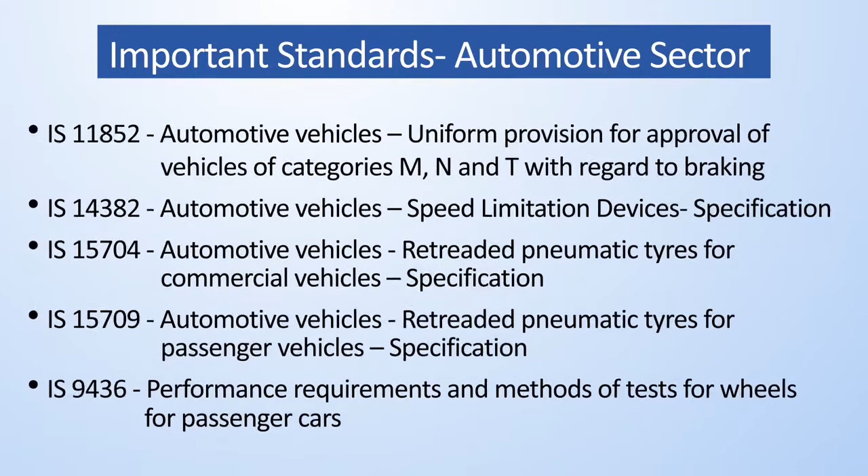BIS has formulated more than 400 standards related to automotive sector. Some of the important standards are on engine and engine components, brakes and braking systems, suspension systems, tires, tubes and rims, and electrical systems. Now let us talk about some of the standards in detail.

Do you know? Cylinder is the power unit of the engine. This is where the fuel is burned and converted into mechanical energy that powers the vehicle. It contains a piston that moves up and down, compressing the fuel which ignites and causes combustion. A cylinder liner is one of the most important functional parts to make up the interior of an engine. It serves as inner wall to the cylinder and forms a sliding surface for the piston rings. A poor cylinder liner results in wear and tear of piston rings, escape of compressed gas, and poor transfer of the heat to the coolant.

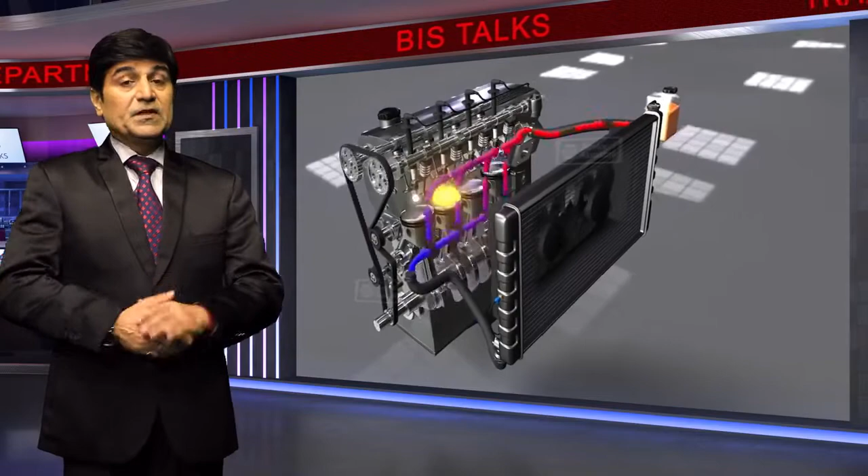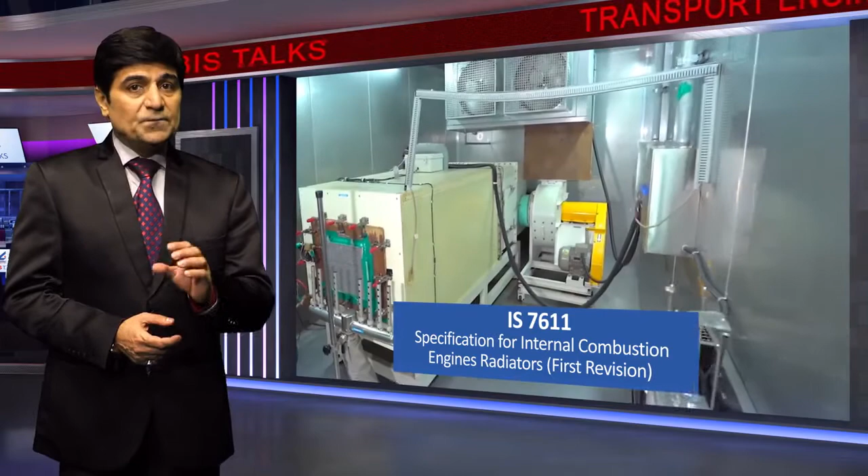Most of us know about the radiator, which is actually a heat exchanger. It transfers heat from the fluid inside to the air outside, thereby cooling the fluid, which in turn cools the engine. Owing to the need for its effective functioning, it is strategically mounted in a position where it receives maximum airflow during the forward movement of the vehicle. The radiator, which passes the various tests specified by BIS, ensures efficient transfer of heat from coolant, effective cooling of engine, and prevention of damage to engine due to overheating.

We use the horn to alert others about the presence of our vehicle on the road. Sound emanated by an electric horn has to be within audible limits specified under IS 1884-1993. Owing to the role of the horn, the Indian standards specify mechanical, electrical and acoustical requirements and methods of testing for electric horns for use in motor vehicles.

The standard specifies terminology, types and classification of horns, dimensions and performance related tests such as high voltage test, dust test, current draw test, operating voltage range test, vibration test, continuous operation test, sound pressure level test, and water sealing test.

Safety glazing standard plays an important role in vehicle safety. Standards for glass in vehicles define the specification for use of glass and glazing in vehicles. Good quality safety glazing ensures adequate transmittance of light and a clear, undistorted field of vision. Use of any substandard safety glazing material in the vehicle could be harmful to the vehicle and its occupants. Using standard glass ensures that in case of any mishap, the windscreen and other glazing should not form a possible source of injury to the occupants.

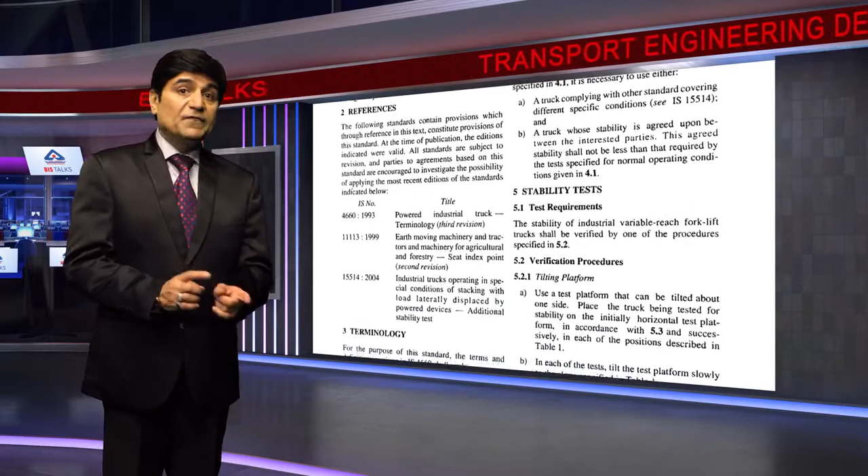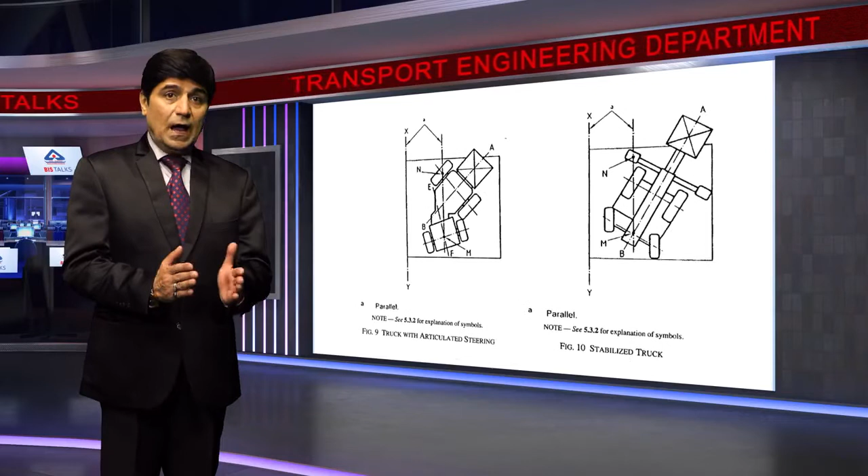Trucks running on these unending roads bring goods and essentials to us from far off places. The goods are packed in large containers and transported all over the world. To ensure that goods reach their destination safely, BIS has prescribed test conditions for the stability of trucks with and without load handling attachments. The stability of trucks equipped with tilting or non-tilting masts or fork arms having a rated capacity up to and including 5,000 kilograms are tested and verified.

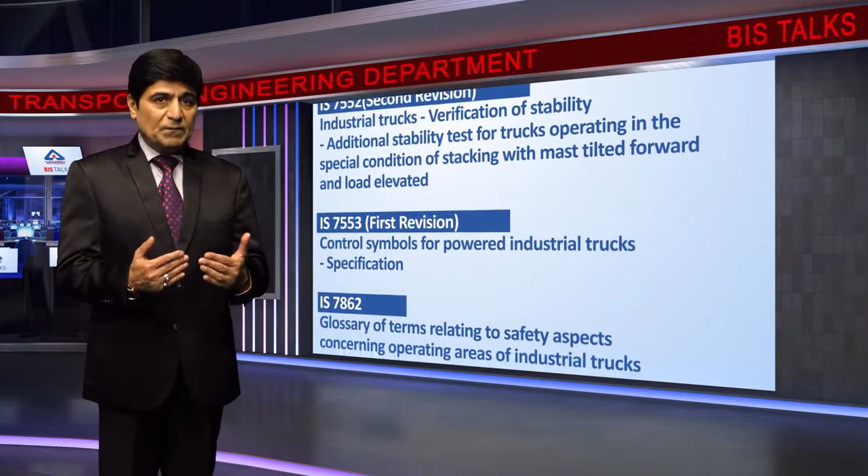To increase the stability and make the load handling vehicles safe, the Transport Engineering Department has been working on certain important designs and published some standards for the test methods.

IS 12056 covers the safety requirements for the integrity and security of fuel tanks, fuel tank filler pipes and fuel tank connections used on automotive vehicles, to minimize the fire hazard resulting from fuel spillage during and after a crash or collision. This standard applies to passenger cars, multi-purpose passenger vehicles, trucks and buses. This standard belongs to a sectional committee which deals with automotive body, chassis, accessories, garage equipment, springs and suspension systems.

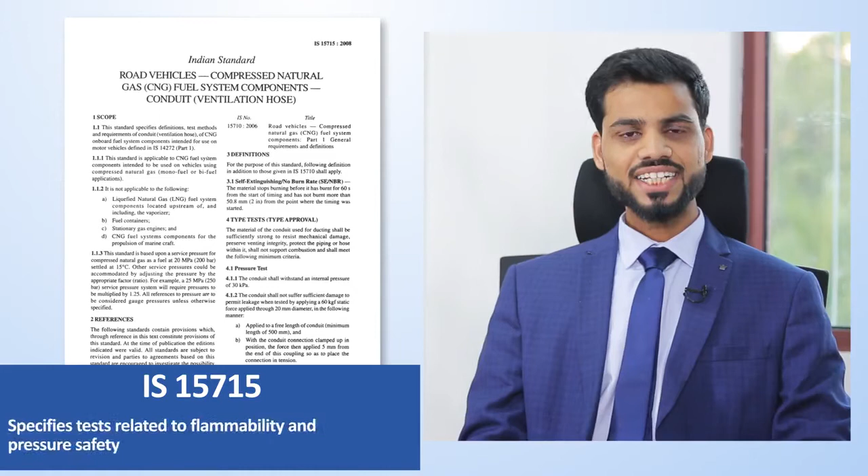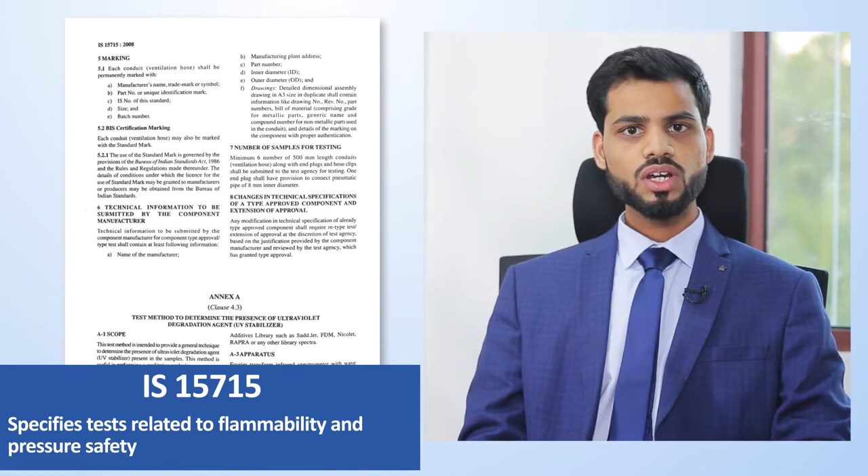IS 15715 specifies the definitions, test methods and requirements of conduit, that is ventilation hose, of CNG onboard fuel system components intended for use on motor vehicles. This standard is applicable to CNG fuel system components intended to be used on vehicles using compressed natural gas, that is monofuel or bifuel applications.

IS 16903 specifies the requirements and dimensions of space and strength of the seats for both driver and passenger and their anchorages for passenger vehicles of category L7, M2, M3 and N category goods vehicles, as well as for quadricycles. This standard is prepared by the technical committee which works on the passive safety crash protection system.

IS 15487 specifies the requirements for the indicator lights to show the status of freight container handling spreaders and grappler arms. This standard is applicable to container handling spreaders with twist locks for handling unladen and laden freight containers, as well as for grappler arms for handling semi-trailers and swap bodies when fitted to counterbalanced lift trucks, single side loading trucks, rough terrain trucks and variable reach trucks.

Well, another important mode of transportation is through the sea route. Gigantic boats and vessels have been used for traveling and transportation of goods for centuries. But now we have modern and sophisticated ships, so the standards in maritime sector have also been formulated.

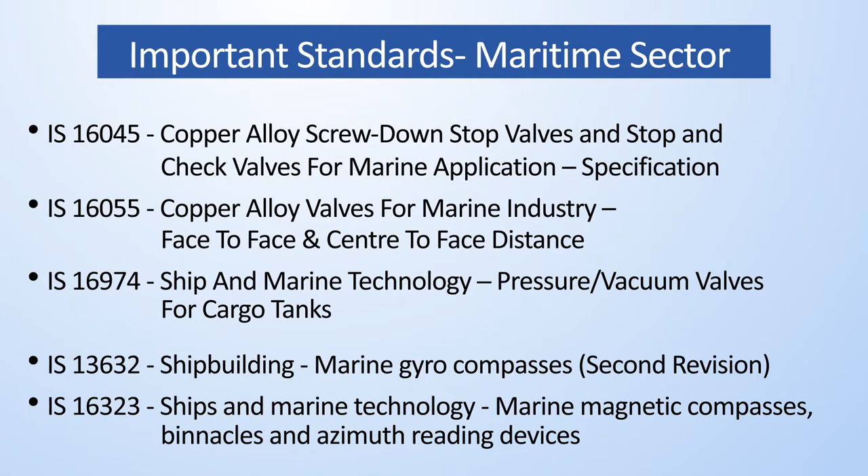Standardization work relating to ships and their systems, accessories and fittings, machinery and equipment for fishing vessels and trawlers, testing procedures, auxiliaries required for the operation of main propulsive machinery, winches, windlasses and steering gears, system and engineering for firefighting, fire protection and detection, magnetic and gyro compasses and connected items, instrument for chart work, auto alarm and auto keying devices have also been standardized.

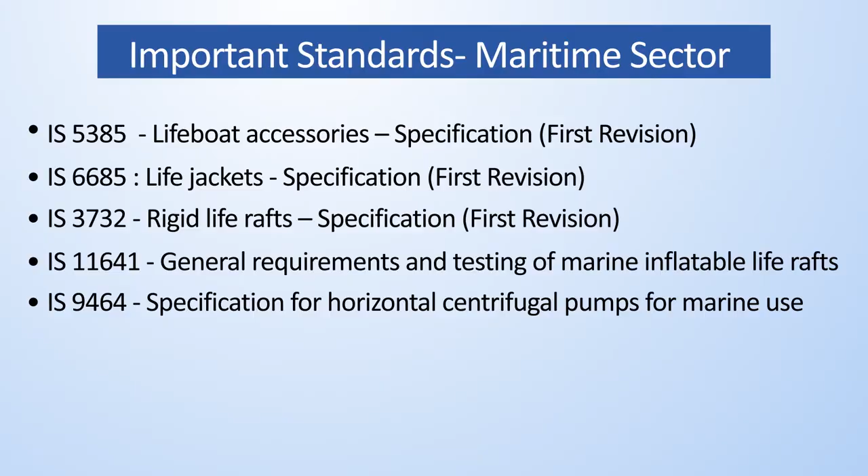Now let's listen to Shri Sharad Kumar, Member Secretary, for more details on the subject.

IS 14747 for lifts on ships lays down specific requirements for the design, installation and inspection of lifts on ships. The lifts in a ship are specially designed to withstand all shipboard conditions such as adverse weather, humidity, rolling and pitching. The standard covers requirements for landing door, car and counterweight and electrical machine. Requirements related to safety circuits like communication, lights, alarm system, and means of escape during emergency have also been specified.

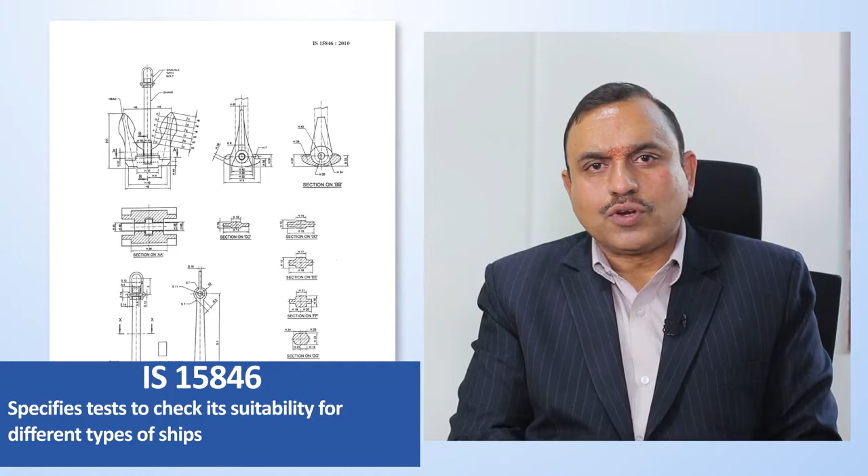IS 15846 for anchors. An anchor is used to connect a vessel to the bed of a water body to prevent the vessel from drifting due to wind or current. This standard gives information on how the anchors are classified, their shapes and dimensions. The standard also specifies the mass, grades of material from which the anchor should be made of, and various tests which are needed to be carried out on an anchor to check its suitability for different types of ships.

IS 13632 for marine gyro compasses. A gyro compass has become an indispensable instrument in almost all naval and merchant vessels for its ability to detect the direction of true north and not the magnetic north. A gyro compass is a form of gyroscope employing an electrically powered fast spinning gyroscope wheel. It utilizes the basic physical laws, influence of gravity and the earth's rotation to find the true north.

The standard specifies construction, performance requirements and type testing of gyro compasses. General tests like voltage and frequency variation test, vibration test, temperature test have also been specified. The availability of a gyro compass is also mandated under International Convention for the Safety of Life at Sea.

IS 6685 for life jackets. Life jackets are designed to assist a wearer to keep afloat in water. It is used for providing a means of safety for all persons whose occupation or recreation is connected with water. The standard specifies design requirements, sizes, requirements related to buoyancy, buoyant material and their protection. The standard specifies tests related to strength, visibility, audibility and other tests for life jackets suitability.

The standard incorporates requirements under Indian acts and rules. Requirements of international conventions like IMO resolutions and safety of lives at sea rules and regulations have also been covered.

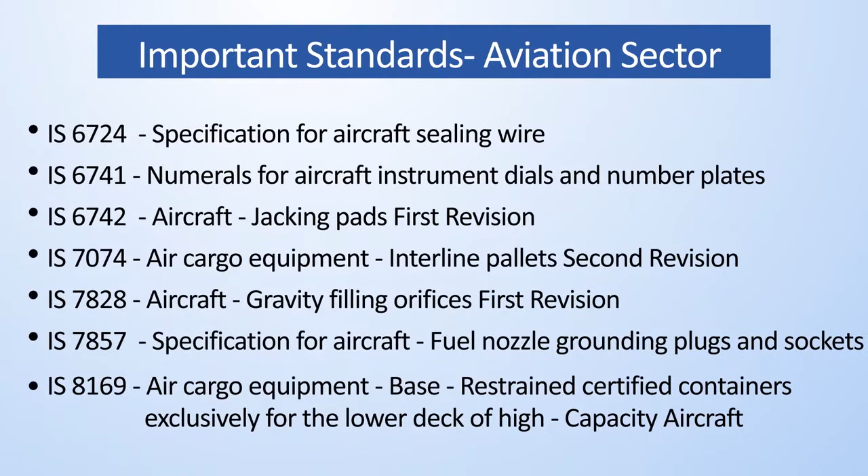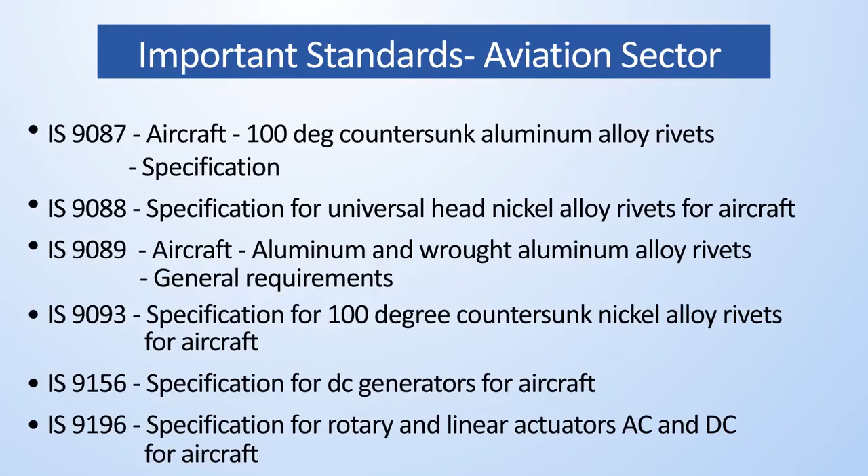Approximately 150 standards have been formulated by BIS in the aviation sector. Some of the important standards are on air cargo equipment, numerals for aircraft, instrument dials and number plates, DC generators for aircraft, general requirements for aerospace bolts and nuts, aircraft safety belts, aircraft tires, rims, seat rails and pins.

Let's listen to the views of Shri Ravinder Beniwal, Member Secretary of Aerospace Sectional Committee.

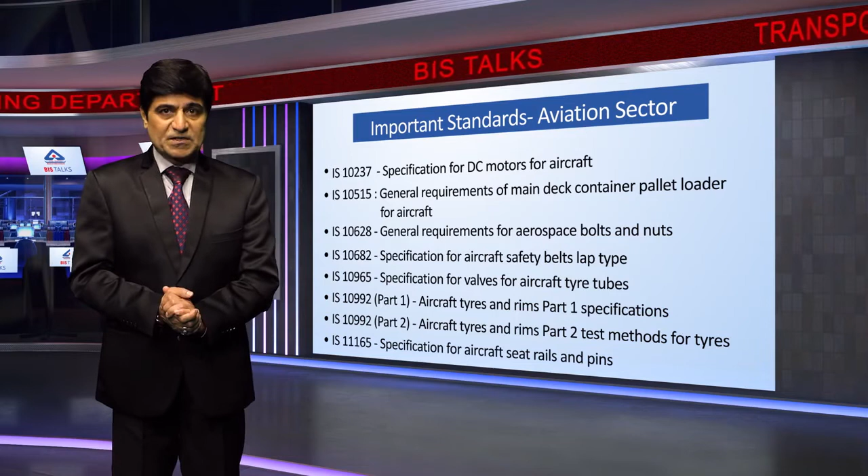I will explain the important standards in aerospace sector, like IS 10240 for general requirements of electrical equipments for aircraft. The safe and economic operation of an aircraft is becoming ever more dependent on electrical and electronic systems. Electrical equipment used in aircraft are subjected to special severities in actual service.

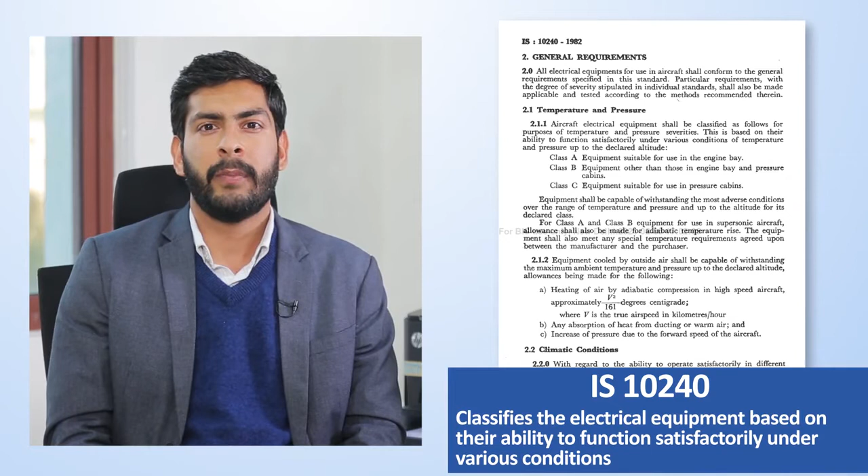This standard classifies the electrical equipment based on their ability to function satisfactorily under various conditions of temperature and pressure up to a certain altitude, climatic conditions, acceleration and vibration, and stipulates the respective requirements.

It also stipulates tests for insulation resistance and radio interference of the equipment while prescribing the design requirements.

Another standard, IS 8252, is on environmental tests for aircraft equipment. This standard details climatic environments against which aircraft equipment should be designed and also defines climatic tests from which the necessary selection should be made to demonstrate that the equipment will be satisfactory for its operational environments.

Although in practice an almost infinite variety of environmental conditions may be encountered, depending on the class of aircraft and grade of equipment etc., it is considered highly desirable to group together standardized test conditions which, when applied in a standard sequence, will demonstrate the operational capability of an item of equipment.

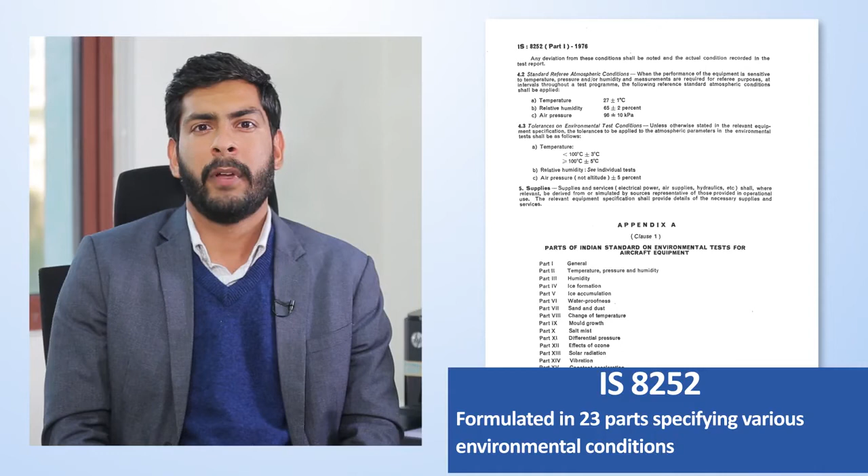This also acts as an aid to equipment manufacturers, keeping the number of grades to a minimum. This standard contains a schedule listing the tests and operational environments applicable to various equipment grades.

We have one more standard, IS 14431, on functional requirements of the airport passenger bus. This standard outlines the functional requirements of an airport passenger bus to be used on the airport ramp to transport passengers between the air terminal and the aircraft.

The intent of the standard is not to specify equipment design but rather to define minimum functional and safety requirements and highlight those criteria which are known to be essential to an efficient and safe operation on civil transport aircraft in the environment of airports.

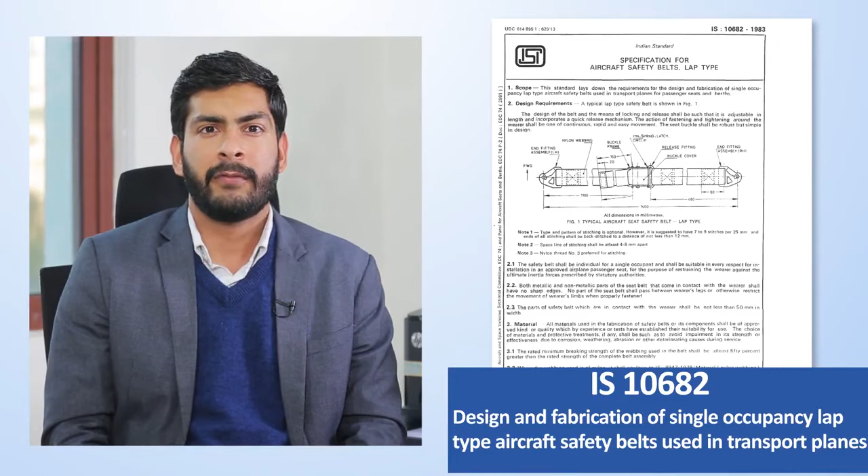Similarly, IS 10682 is a specification for aircraft safety belts. As you are aware, safety belts in aircraft are helpful in situations such as turbulence. This standard lays down the requirements for the design and fabrication of single occupancy, lap type aircraft safety belts used in transport planes for passenger seats and berths.

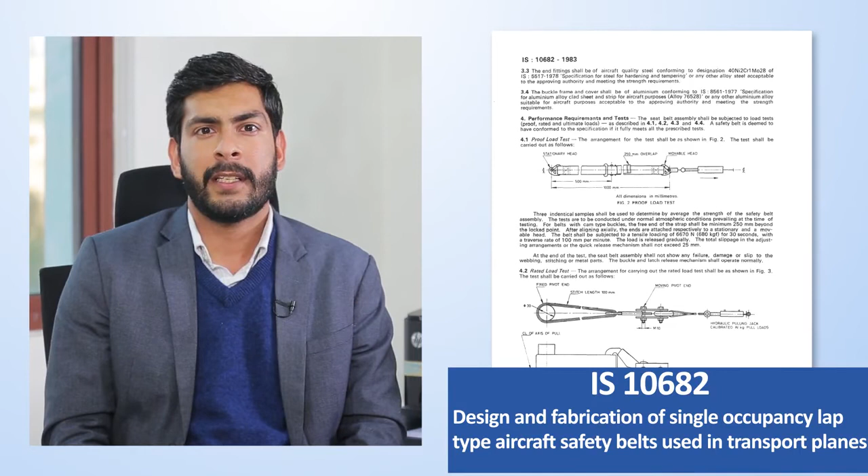Material and design requirements and load and pull-out tests are specified so that the design of the belt and the means of locking and release shall be such that it is adjustable in length and incorporates a quick release mechanism.

For aerospace quality management system requirements, we have IS 16000. This standard specifies requirements for an aerospace quality management system where an organization needs to demonstrate its ability to consistently provide product that meets aerospace customer and applicable regulatory requirements.

It mainly focuses on components of the aerospace quality management system like management responsibility, product realization, and measurement, analysis and improvement.

Electric cars operate using electric power. They have an electric battery that is used in running a motor which drives the car. This type of vehicle facilitates substantial savings in fuel cost through the efficiency of the engine.

Bureau of Indian Standards has formulated IS 17191 Part 1, 2 and 3, 2019, for effective and accurate measurement of energy consumption, range and power of electric vehicles.

IS 17191 is made by the sectional committee which deals with electric and hybrid vehicles. It is prepared in three parts, where part 1 specifies the methods of measurement of electrical energy consumption for electric powertrains.

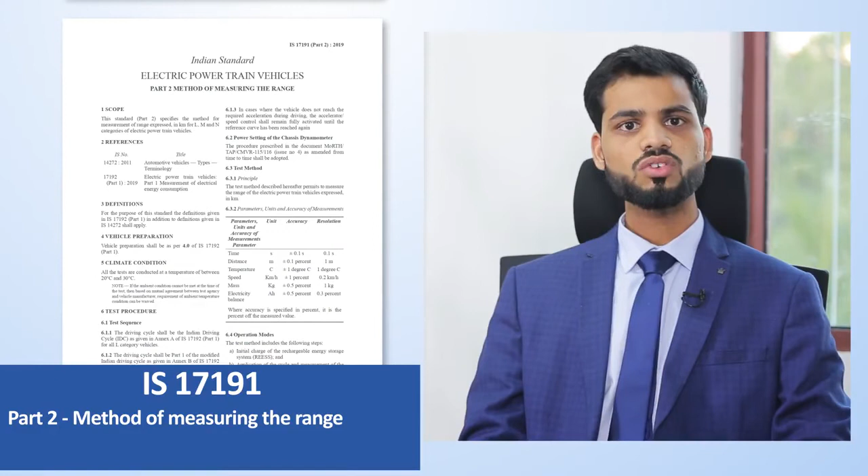Similarly, part 2 specifies the method of measuring the range, and part 3 talks about the measurement of net power and the maximum 30-minute power.

With the future getting smarter day by day, the role of standards has also to be smart. Transporting goods and people safely, efficiently and smartly is essential to keep pace with a fast-changing future.

To address this challenge, BIS is dedicated to the development of standards on intelligent transport systems.

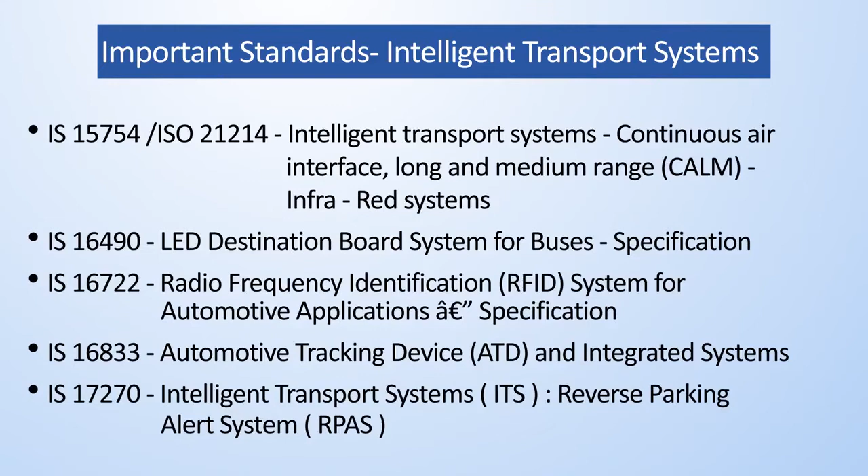BIS has formulated about 20 standards in intelligent transport systems. Some of the important standards are on system architecture, electronic fee collection, road transport and traffic telematics, LED destination board system for buses, radio frequency identification system and road traffic safety management systems.

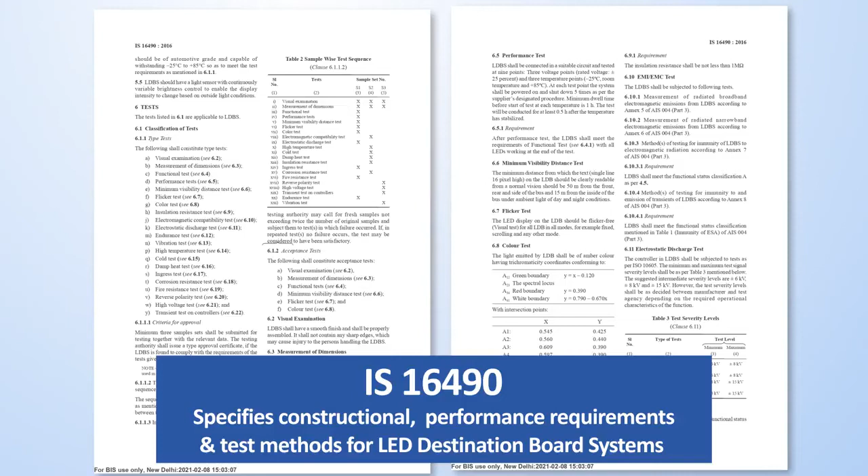Let's talk about IS 16490-2016 for standards on LED destination board systems. Installation of destination boards with light emitting diode or LED display covered in this standard are very helpful in knowing route numbers and destinations by the commuting public. Standards for LED destination board systems for buses, which specify the constructional and performance requirements and methods of test for LED destination board systems or LDBS for use in all categories of buses and coaches, have been developed by this committee for the benefit of the commuters.

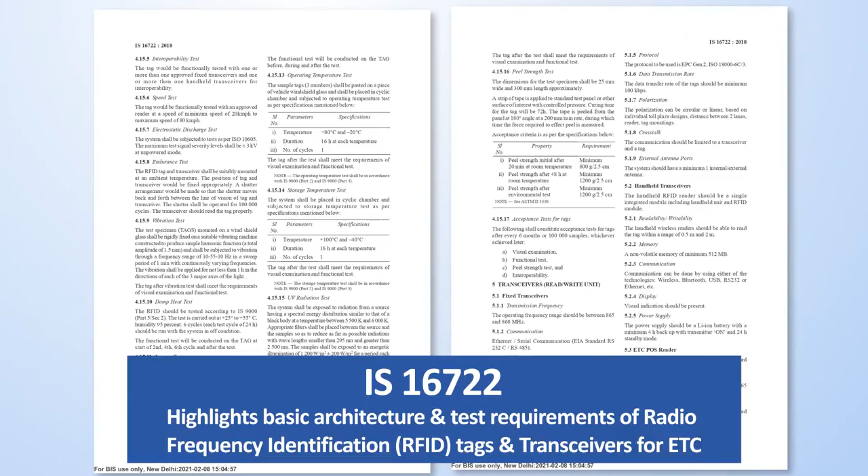IS 16722-2018 is for Radio Frequency Identification, RFID, system for automotive application, which highlights the basic architecture and test requirements of radio frequency identification tags and transceivers for Electronic Toll Collection, ETC, application. This standard provides guidance on how to organize and implement smart transportation by digitally processed payment in order to provide a safe and convenient payment method for commuters.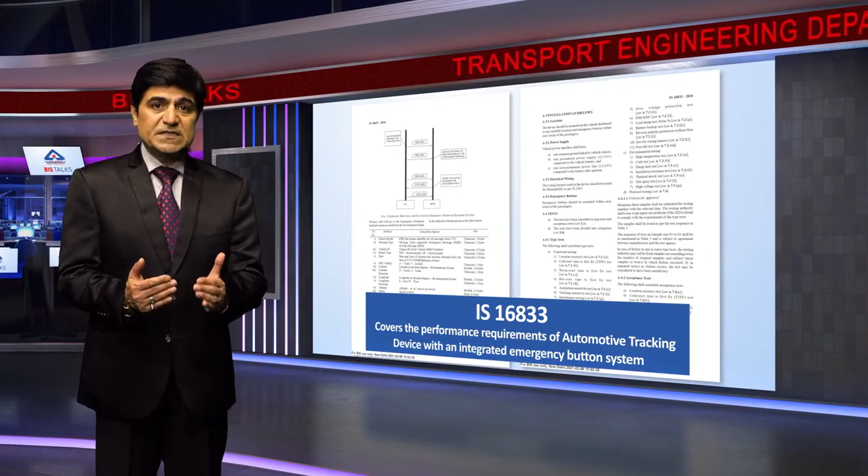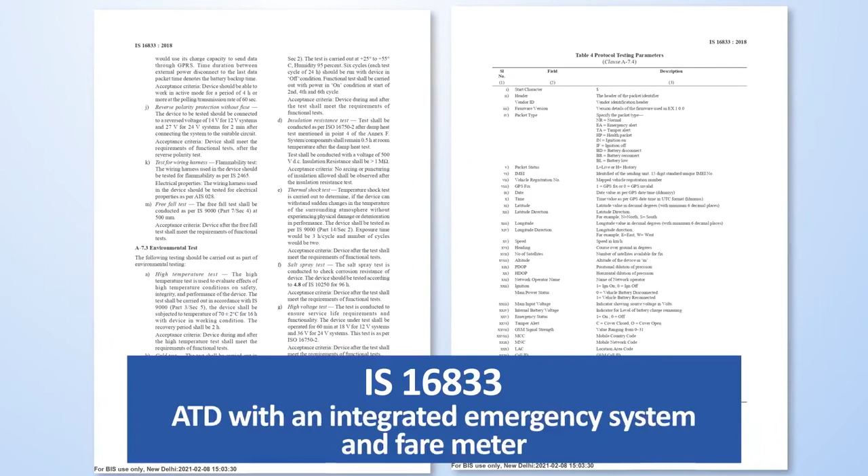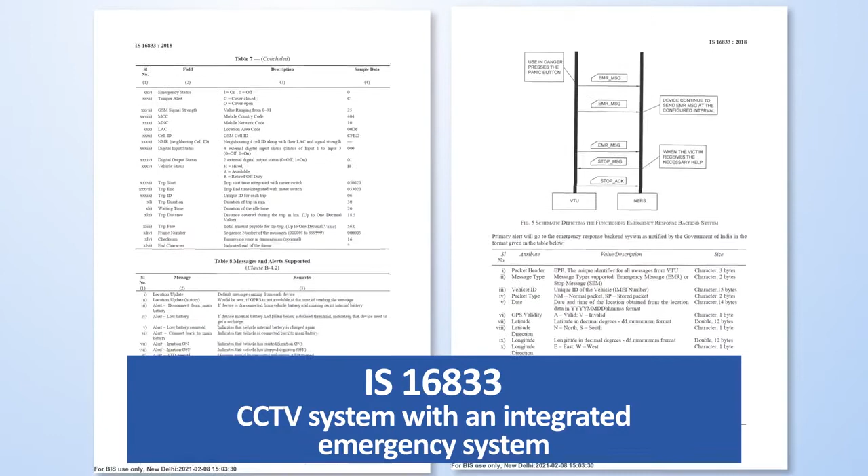Another standard, IS 16833-2018, by this committee has been developed for Automotive Tracking Device and Integrated System, ATD, which defines the basic architecture and performance requirements of automotive tracking systems. The standard covers the performance requirements of the automotive tracking device with an integrated emergency button system and other configurations or applications of ATD in different annexes, as integrated emergency system and fare meter, and CCTV system with inbuilt tracking system and integrated emergency system.

During the Nirbhaya case, there was a problem. Some incident happened in the country. Now regulation has been made that we introduce a vehicle tracking system in the buses. All activities going on in the bus can be remotely monitored. At any particular point, if any accident takes place, one can press a panic button which is available at every 1 meter or 1.5 meters in the bus. So a passenger can just press it. All the activity of the bus, whatever is going on prior to the event and even after the event, is transmitted to the control room, who takes care of further necessary action to be taken about that bus.

What seemed impossible yesterday is now very much possible with access to today's technology and information systems. Maintaining continuity of the standards formulated so far in contemporary areas of technology and acting proactively for contributing to the Atmanirbhar Bharat initiative of the Government of India, BIS has started working for the formulation of Indian standards for various components of hydrogen fuel cell electric vehicles such as hydrogen cylinder, automatic shut-off valve, thermally activated pressure relief device, check valve, fueling receptacle, pressure regulator, manual cylinder valve, gas injector and pressure relief valve, etc.